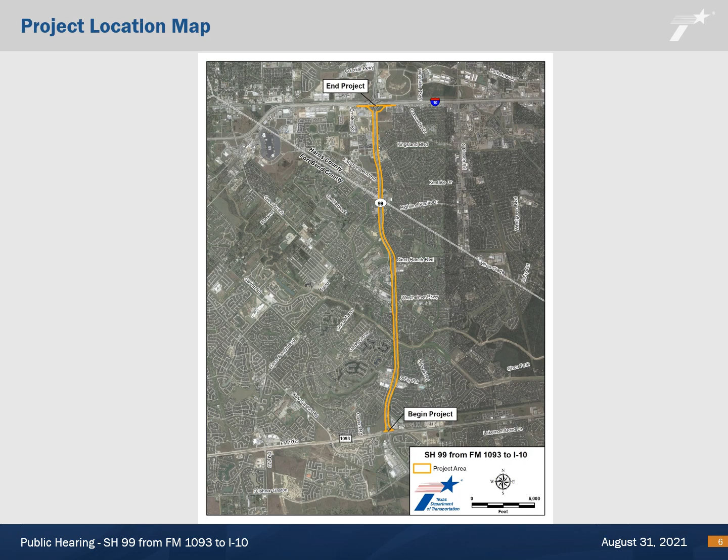The proposed project is located along SH99 from FM 1093 to I-10 in Fort Bend and Harris counties, a distance of approximately 5.9 miles. The proposed project is needed due to current and projected growth in the area, causing traffic demand to increase. In addition, the existing facility does not have adequate capacity to accommodate current mobility needs. The purpose of the project is to improve mobility within the project area.

This slide shows the existing typical section in areas without frontage roads, from north of FM 1093 to north of Highland Knolls Boulevard. The existing facility consists of 4 travel lanes, 2 in each direction, and a grassy median, within an existing right-of-way width of 300 to 400 feet.

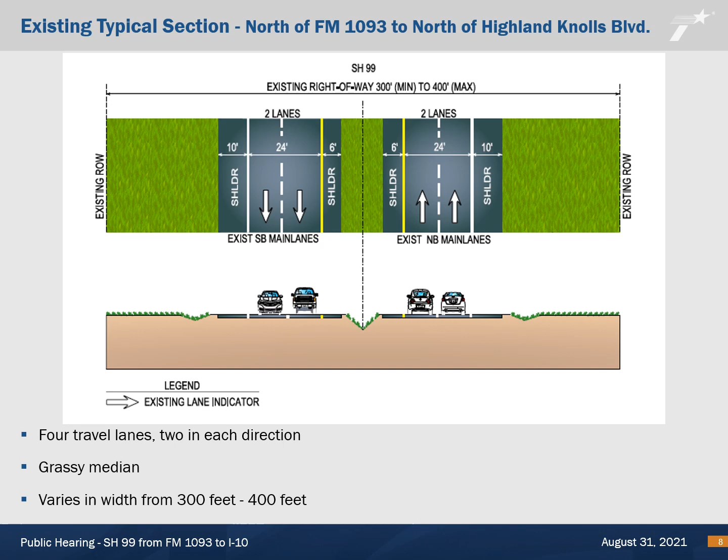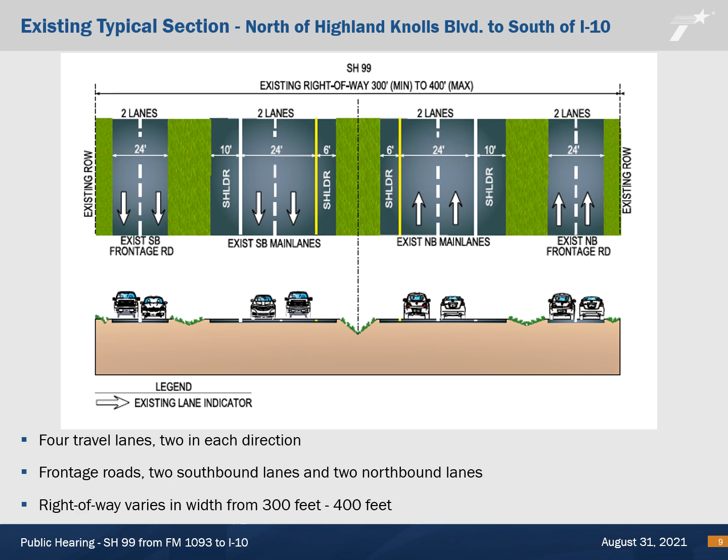This slide shows the existing typical section in areas with frontage roads, from north of Highland Knolls Boulevard to south of I-10. The existing facility consists of 4 travel lanes, 2 in each direction, with a grassy median and 2-lane frontage roads in both north and southbound directions, within an existing right-of-way width of 300 to 400 feet.

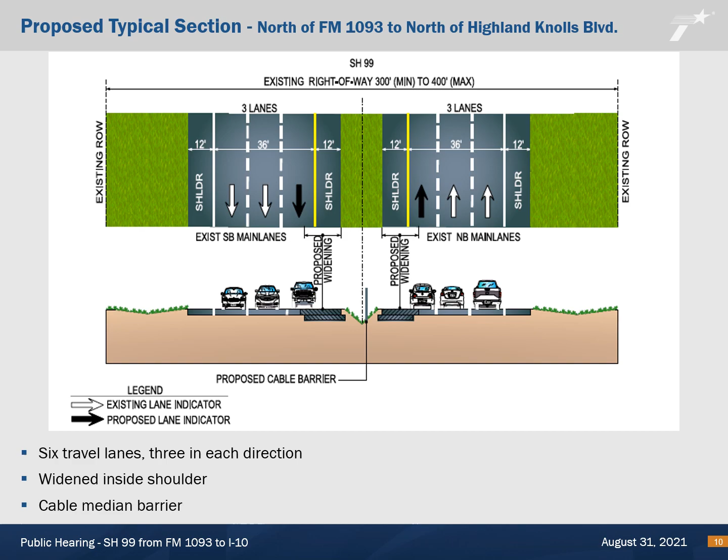This slide shows the proposed typical section in areas with existing frontage roads, from north of Highland Knolls Boulevard to south of I-10. The proposed facility would consist of 6 travel lanes, 3 in each direction, widening the shoulders from 6 to 12 feet wide, and adding a cable median barrier. The new travel lanes would be constructed in the median area. The existing frontage road configuration would remain the same.

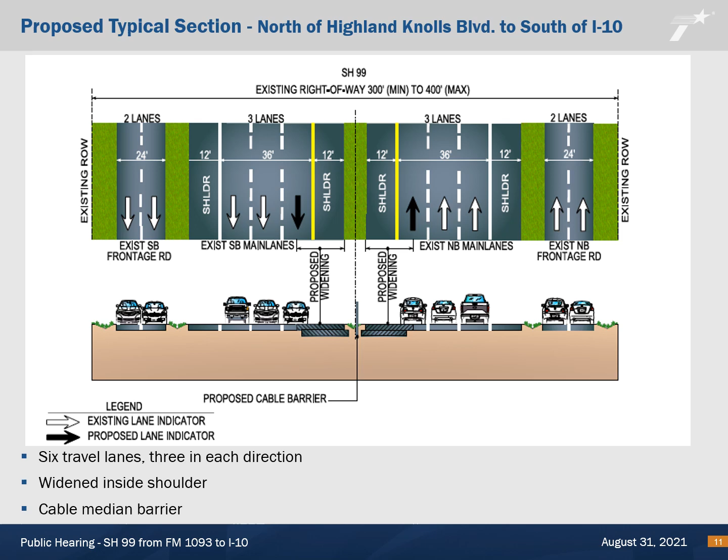In addition to the improvements described on the previous two slides, the proposed project would include modifying ramps in several locations and adding right turn lanes at major intersections. These changes are shown in detail on the project schematic.

Here is a screenshot of the legend and a schematic that you can find on the hearing webpage. The legend is included on each page of the schematic so you can reference it as you review them. The screenshot shows the colors that fill the proposed design. These colors identify the limits and major aspects of the project.

Let's walk through them. The proposed roadway main lanes are shown in yellow. Proposed bridge structures are in red. Proposed work on existing frontage roads is in blue. And proposed right-of-way is shown with a thick black dashed line. A black arrow indicates the traffic flow direction.

This slide also includes a detailed look at a portion of the schematic, or design drawing, of the project. This slide shows SH99 over Cinco Ranch Boulevard.

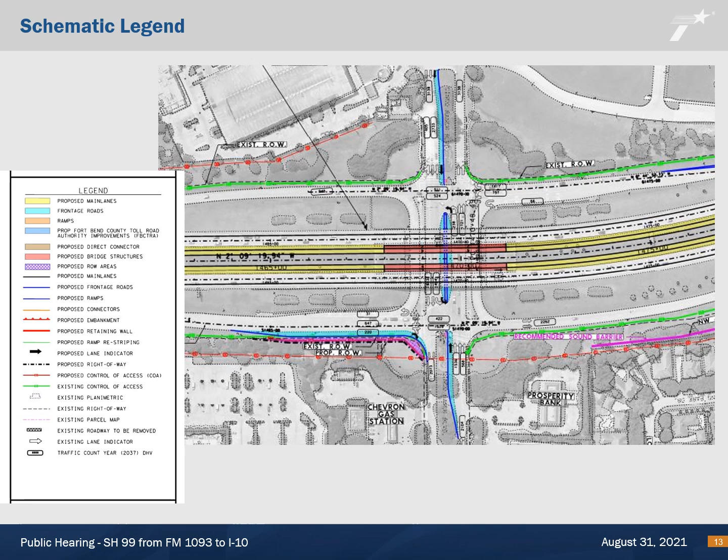Note that in the project area, Fort Bend County is proposing to construct frontage roads in areas where there are none today. The proposed frontage roads would extend between Cinco Ranch Boulevard and Westheimer Parkway, and between Fry Road and FM 1093, along the southbound side of Grand Parkway.

The Fort Bend County Toll Road Authority is also proposing a project that would provide direct connectors from westbound FM 1093 to northbound SH99, and from eastbound FM 1093 to northbound SH99. These are separate projects proposed by other agencies, outside of TxDOT, and are not addressed in this virtual public hearing.

Subject to final design considerations, the proposed project would require approximately 0.96 acre of additional right-of-way and would not include any displacements. This proposed additional right-of-way would be required for corner clips at 7 major intersections to accommodate right turn lanes. TxDOT offers relocation counseling and financial assistance to residences and businesses that are displaced by the acquisition of highway right-of-way in accordance with the Uniform Relocation Assistance and Real Property Acquisition Policies Act of 1970.

The proposed project is listed in HGAC's Financially Constrained 2045 Regional Transportation Plan and in HGAC's 2021 through 2024 Transportation Improvement Program. The estimated construction cost for the proposed project is approximately $85 million and is programmed with state and federal funds. This project is fully funded for construction, and construction activities are anticipated to begin in late 2022. The project would take approximately 2 years to construct.

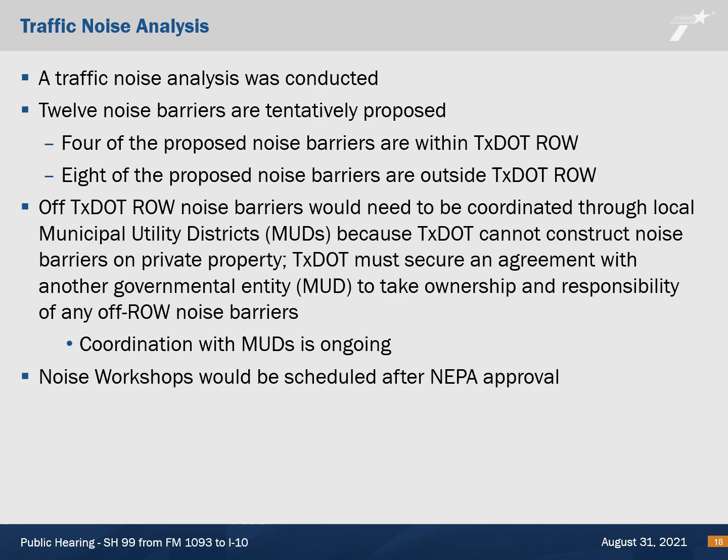Noise workshops with adjacent and benefited receivers for the 4 proposed noise barriers inside TxDOT right-of-way would be scheduled to determine if the barriers are desired. Noise workshops with the associated adjacent and benefited receivers for the 8 proposed noise barriers outside of TxDOT right-of-way would be scheduled if an agreement can be reached with associated MUDs.

This is an example of what a noise barrier would look like from the street if it was constructed. The residents have an option of 2 different styles on their side of the barrier.

Of the 12 proposed barriers shown on the following slides, barriers 1 through 6 and 9 and 10, highlighted in orange, are currently proposed outside of TxDOT right-of-way. The remainder, highlighted in green, would be constructed within TxDOT right-of-way.

Proposed noise barriers outside of TxDOT right-of-way are shown on this and the following several slides with a thick orange line. Proposed noise barriers inside of TxDOT right-of-way are shown on later slides in green.

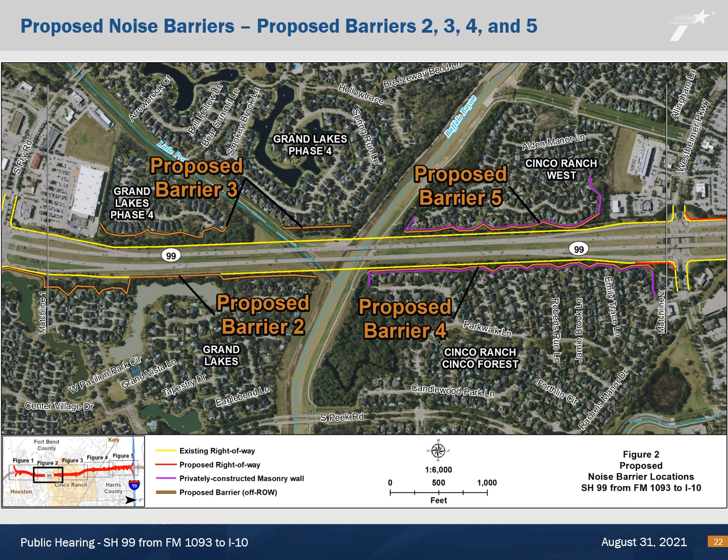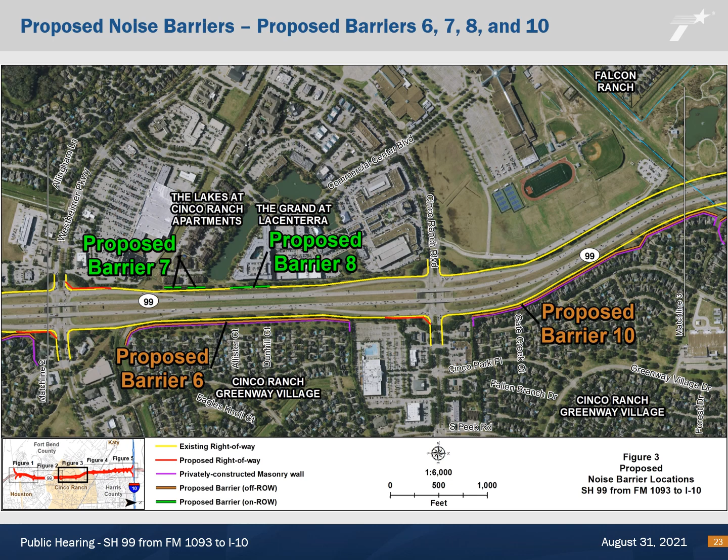Figure 3 shows proposed barriers 6, 7, 8, and 10. On the east side of Grand Parkway, Barrier 6 extends from north of Westheimer Parkway at the drainage ditch to Lifetime Fitness near Cinco Ranch Boulevard at the Cinco Ranch Greenway Village neighborhood. Barriers 7 and 8, shown in green, are on the west side of Grand Parkway. Barrier 7 is at the Lakes at Cinco Ranch Apartments, and Barrier 8 is at the Grand at Lacenterra Apartments. This figure also shows the southern portion of Barrier 10, starting at Prosperity Bank, near Cinco Ranch Boulevard, on the east side of Grand Parkway, at the Cinco Ranch Greenway Village neighborhood. Proposed barriers 6 and 10 would be outside of TxDOT right-of-way, and proposed barriers 7 and 8 would be inside of TxDOT right-of-way.

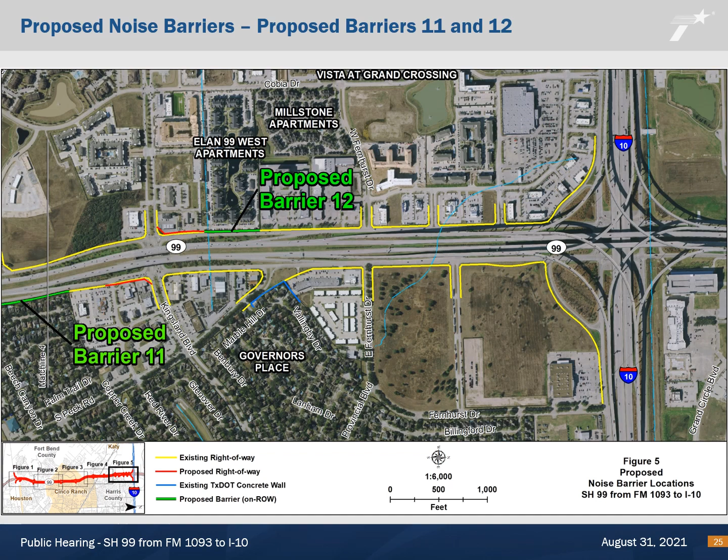The northern portion of Barrier 11 is also shown on Figure 5, ending south of Lupe Tortilla at the Heritage Square neighborhood on the east side of Grand Parkway. Figure 5 also shows Barrier 12 at the Elan 99 West Apartments on the west side of Grand Parkway. Proposed barriers 11 and 12 would be inside of TxDOT right-of-way.

The hearing webpage contains all materials presented in this public hearing, including this presentation, exhibit boards, a comment card, a project handout, schematic layouts, and environmental tech reports. The schematic layouts provide a more in-depth look at such details as intersection improvements and additional right-of-way. The schematic files are large and may require more time to download than the other project materials.

In the next steps of the environmental process, all comments received during the comment period will be reviewed, and responses to comments will be provided in the official public hearing record. Right-of-way acquisition and final design would take place after environmental clearance. Construction is anticipated to begin in late 2022 and take approximately 2 years.

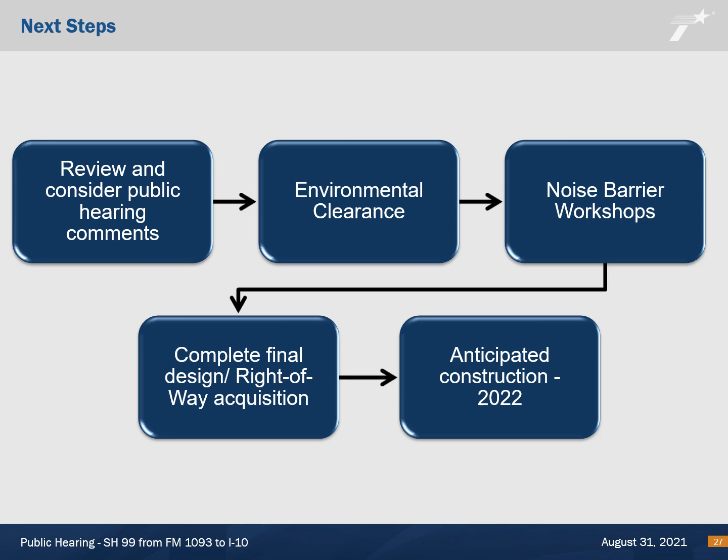Comments can be provided by phone. Call the project comment phone line at 281-346-3197 to leave a verbal testimony. You can also download the comment card from the hearing webpage, www.txdot.gov, keyword search SH99 from FM 1093, or fill out a comment card at the in-person public hearing and drop it in the comment box.

Email the comment form to hou-piwebmail@txdot.gov. Mail your comment to the TxDOT Houston District Office, attention Director of Project Development, P.O. Box 1386, Houston, Texas 77251-1386. Comments must be received or postmarked by Friday, September 17th, 2021, to be included in the public hearing summary report. Responses to verbal and written comments received during the comment period will be included in the public hearing summary report.

That report will be posted on the hearing webpage when completed later this fall.

Lastly, don't hesitate to contact us with any questions. Please feel free to contact Reina Gonzalez, TxDOT Project Manager, at 713-802-5269, or Tyrone Miller, Right-of-Way Project Manager, at tyrone.miller@txdot.gov with any questions or comments.